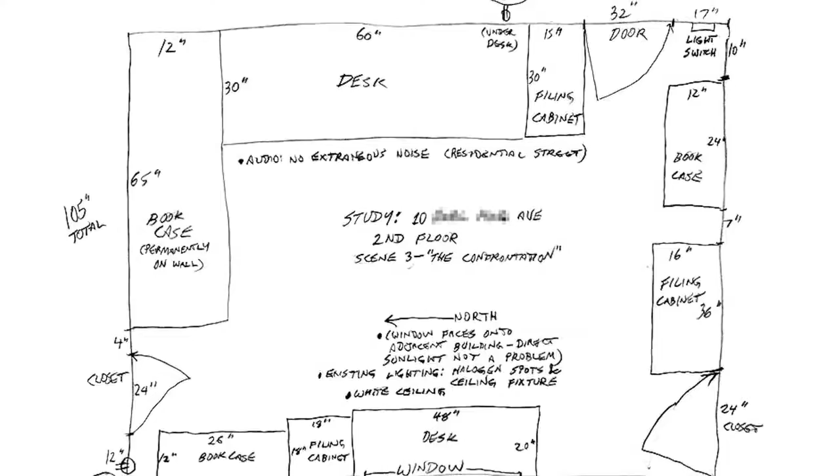How to make your own scale drawings. Suppose you're on location and you need to make a scale drawing of the room in which you'll be shooting. You'll need a rough sketch of your original location with all dimensions on it, including walls, doorways, windows, and large furnishings important to your shoot. You get this by going to your location and measuring everything you can imagine you'll need to deal with for blocking and lighting the scene.

You'll need a ruler, a pencil, not a pen because you'll probably be making some mistakes, an eraser, and some paper. Regular paper is fine, although some people like to use graph paper when they do their scale drawings. But then you're stuck with those little squares all over your drawing. If you can find graph paper with very faint blue lines for the graphing, those lines will often not photocopy, so you're left with a nice clean drawing. You can get this kind of graph paper in bookstores and stationery shops.

But how do you make a sketch drawing in the first place? Let's look at this example. Here's a panoramic view of a small room with some bookcases and a couple of desks in it. It has, left to right, an entrance door with a hat hanging on the back of it, a plain white closet door, a window with a curtain on it, and another fancier closet door. And a whole lot of bookcases, desks, filing cabinets, and other stuff.

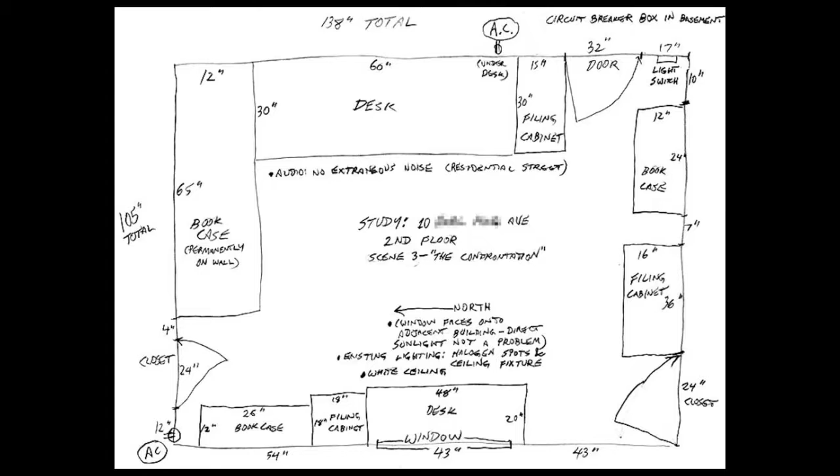It's a small space, but we want to shoot a quick sequence in this room. Here's my quick sketch of the room. Compare the picture with the actual floor plan. As we go clockwise from the upper left corner of the floor plan around the room, you can see what I've done. I've moved from left to right and measured everything I could find, then sketched out the space.

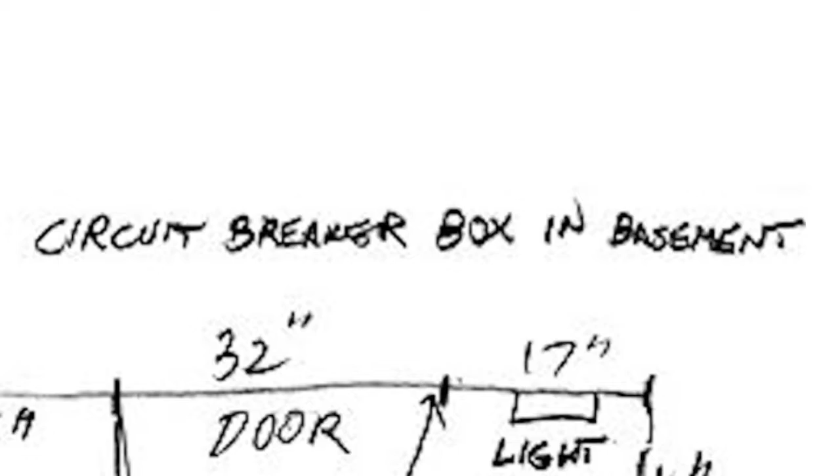You probably noticed that as long as I was on location anyway, I checked on a few other things like AC outlets, circuit breaker location, extraneous audio conditions, which way north is, sunlight issues, existing lighting, and so on. All good things you should look for while on location.

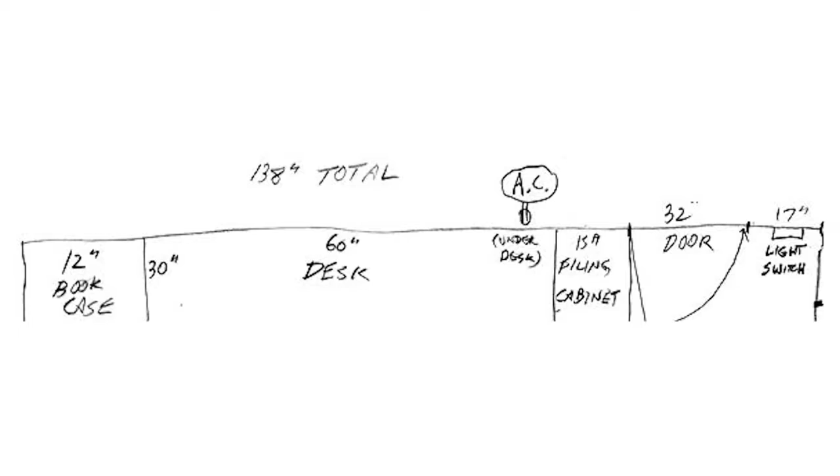You'll also see that the numbers sometimes don't quite add up. For example, along the top of the drawing I found a 12-inch bookcase, a 60-inch desk, a 15-inch filing cabinet, a 32-inch door, and a little 17-inch wall space. Now those don't add up to the 138 inches I measured the room to be. They add up to 136 instead. Unless you're really careful, you're going to have this kind of rounding error in your measurements. Nevertheless, things should be pretty close.

Making the final scale drawing. So my room is 138 inches by 105 inches overall. Now my piece of paper is 8.5 by 11 inches. Picking up my calculator, I can check what the biggest drawing is that I can do on the paper by checking dimensions like this. The longest dimension in the room is 138 inches, divided by the longest dimension on the paper, which is 11 inches, gives me this. The shortest dimension in the room is 105 inches. I divide that by the shortest dimension on paper, which is 8.5 inches, and I get this.

As luck would have it, I won't quite be able to squeeze the drawing on the sheet at 1 inch equals 12 inches. That drawing would be a little bit too big on the longest dimension. That's too bad because it's a common 1 inch to 1 foot scale, which is so easy to visualize. I'll have to go with something smaller, say 1 inch equals 24 inches. But why wouldn't I go to something in between, like 1 inch equals 15 inches or 1 inch equals 18 inches? There's nothing wrong with using those scales if you want, but I like using 24 inches because that's equal to 2 feet. Again, making it a little easier to understand.

But there's another reason. Architect's scales. These funny looking triangular rulers have a standard ruler on one of their edges, but the other 5 edges have scale rulers, 2 to an edge. The common architect's scale has 3/32 of an inch equals 1 foot. That's a 1 to 128 scale. 3/16 of an inch equals 1 foot. That's a 1/64th scale. 1/8 of an inch equals 1 foot, a 1/96th scale. 1/4 inch equals 1 foot, a 1/48th scale.

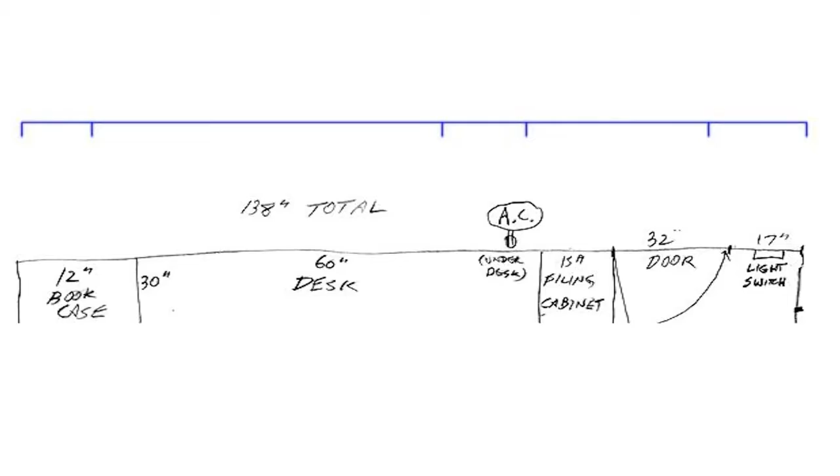You can see it sort of looks like my rough sketch drawing, but it's a lot more accurate on the page. You can continue along like this, drawing the walls of the room, all the objects, the desks and the bookcases, then adding things like electrical outlets, text information, people, cameras, and lights.

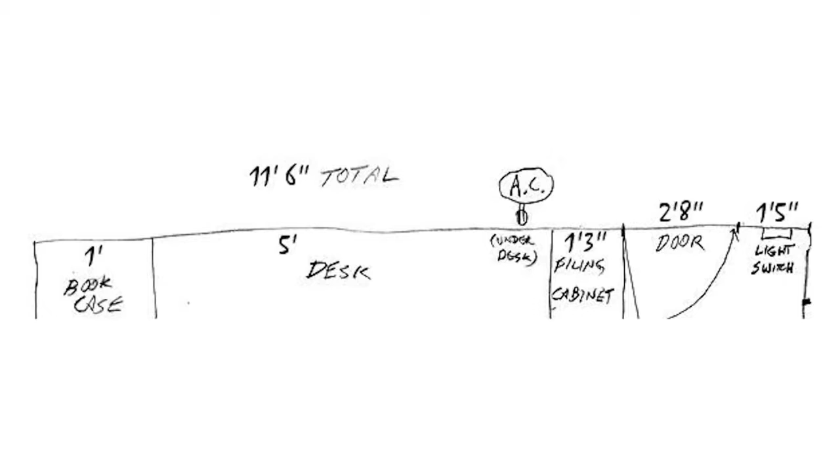Using an architect's scale. All of those numbers above are pocket calculator button pushes to get the final number. But if you've bought an architect's scale and you've had the foresight to take your measurements on location in feet and inches, you won't need to use a calculator when you're drawing. Here's the top edge of the room drawing with the measurements taken in feet and inches. And you're going to use this scale to do your drawing.

Notice that 1/2 symbol on the top right. That will be your scale. And you'll also notice that it has a lot of small fractions of a foot measurements on the far right. Then, reading left, the scale starts at 0 and moves forward towards the left of the scale. Let's work our way across the top edge of the room using our architect's scale.

The bookcase is 1 foot deep, so on our paper it'll be as long as one of the big whole foot lines. The desk is 5 feet wide, so on our paper it will be 5 big lines long. The filing cabinet is 1 foot 3 inches wide, so on our paper it'll be 1 big line plus 3 inches on that little scale.

The door is 2 foot 8 inches wide, so on our paper it'll be 2 big lines plus 8 inches more on the little scale. The little piece of wall with the light switch is 1 foot 5 inches wide, so on our paper it'll be 1 big line plus 5 inches on that little scale.

You can continue along like this with the walls of the room and all the objects, then adding the electrical outlets, the text information, the people, the cameras, and the lights. But because you've used an architect's scale, you haven't had to use a pocket calculator to work out how long your scaled lines are, and you haven't had to use this ruler. That means you can draw scale drawings much faster than using a regular old school system like this.

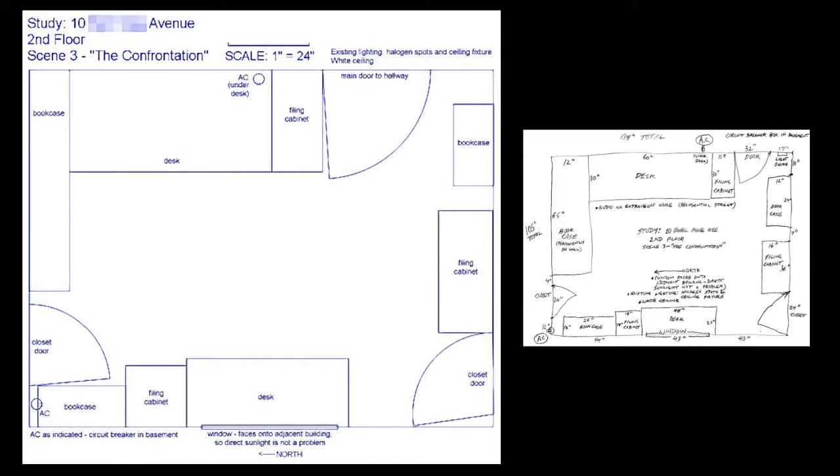The final version. Here's what the drawing looks like once it's completed. Compare this to the rough sketch I made earlier. What if I measure in metric? The same principles apply, except you're dealing with meters and centimeters. You'll want to buy a metric scale if you're working in this measuring system. If you're not sure which kind to buy, ask the bookstore or art supply store salesperson for more assistance.

Can I just use a piece of graph paper? Sure, just figure out how scaled your drawing needs to be on that sheet of paper. For example, 1 square equals 6 inches or whatever. Then start drawing walls and objects with a ruler using that scale. It might not be as accurate, how big is a quarter of a square? But it will look fairly decent, although not as clean as the architect's scale system. Don't forget that unless you use light blue ruled graph paper, all those squares will show up in a photocopy, making the drawing somewhat messier than if you use other scale drawing systems.

Can I use a computer? Of course you can. If you're graphic savvy and want to use a paint program of some type, or if you have access to a computer design program, by all means use it. This tutorial here was designed to show you how to draw a scale drawing by hand using simple tools. For straightforward drawings, though, it's often quicker to use a pencil and a scale to lay out a quick drawing than to fire up the computer software and warm up the printer. But let your own preferences decide.